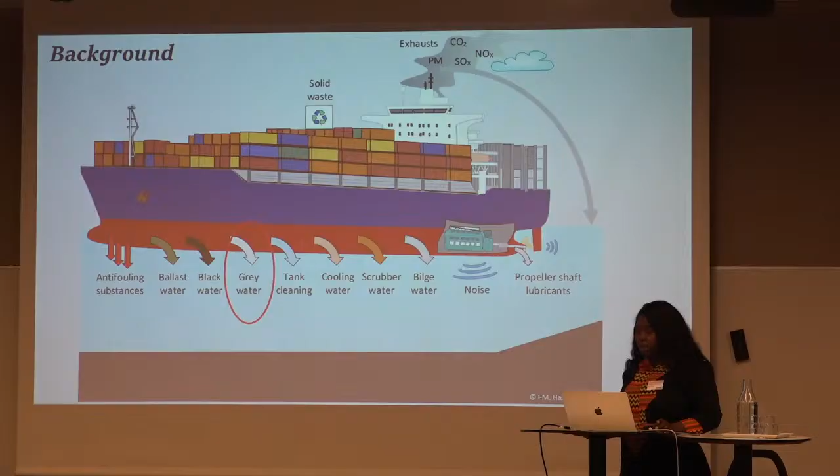So without repeating what my colleagues have already presented, we will be discussing greywater, the quantities and the quality. So greywater from ships is wastewater or sanitary wastewater from the accommodation, from the showers, from the kitchen, the laundry machines, and various things within the ship. And it contains chemicals, nutrients, metals, pharmaceuticals, as we are going to see.

And generation rates vary according to the size of the ship or the activities carried out within the ship. Greywater lacks international regulation right now, and that is the call for concern. Only recently has this raised an eyebrow, because of a lot of research that has been carried out recently on greywater. And management strategies are based on industry policies or initiatives and environmental stewardship.

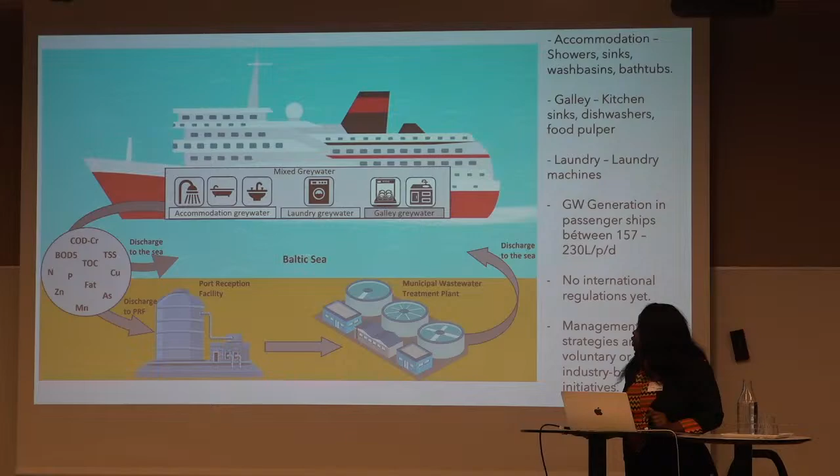So greywater could be discharged directly into the sea from the ship when generated, or it could be discharged to port reception facilities at the port, and then treated at the municipalities before discharging to the sea. Some other ships, like cruise ships, mix greywater and black water or sewage together and treat on board before discharge. And research has also shown that some ships mix greywater with food waste and discharge in accordance with the provisions of MARPOL Annex V.

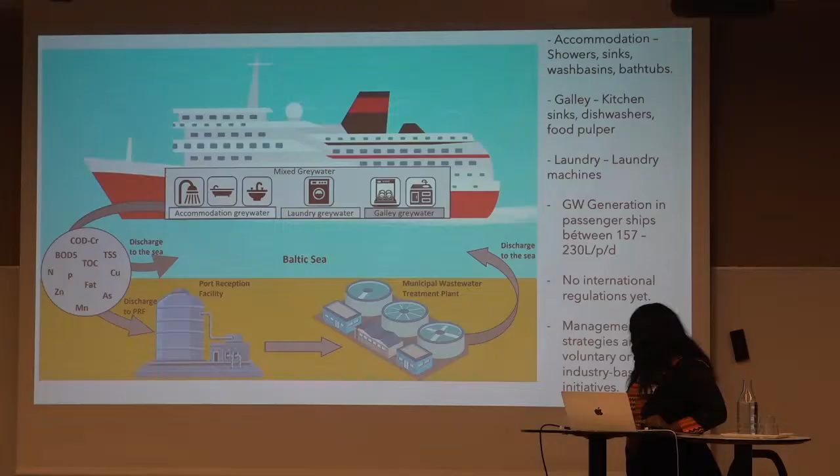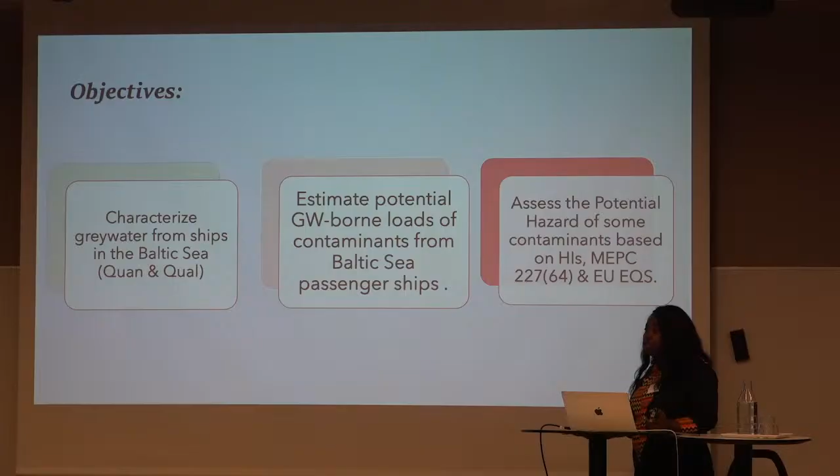So our objective within the framework of this presentation will be to characterize greywater, the quantity and the quality. We will also estimate the potential greywater-borne contaminants from Baltic Sea shipping as a whole. And we will look at the potential hazard of some targeted contaminants based on hazard indexes, MARPOL resolution, and as well the EU environmental quality standards.

So within our research, we worked with six ships. One is a special purpose ship, 5 are ro-pax ships. Ro-pax ships carry both passengers and cars. S2 and S3 are from the same company as sister ships, while S4 to S6 are also sister ships. The biggest ones are S4 to S6, then S2 comes after, and S3. Then the smallest ship is S1.

And the volume of greywater generated by these ships also varies, like I mentioned, based on the size of the ship. Sometimes there are discrepancies about that, but the number of persons on board determines the greywater generation volumes. The volumes are also seasonal and annual. We experience annual variations and then seasonal variations.

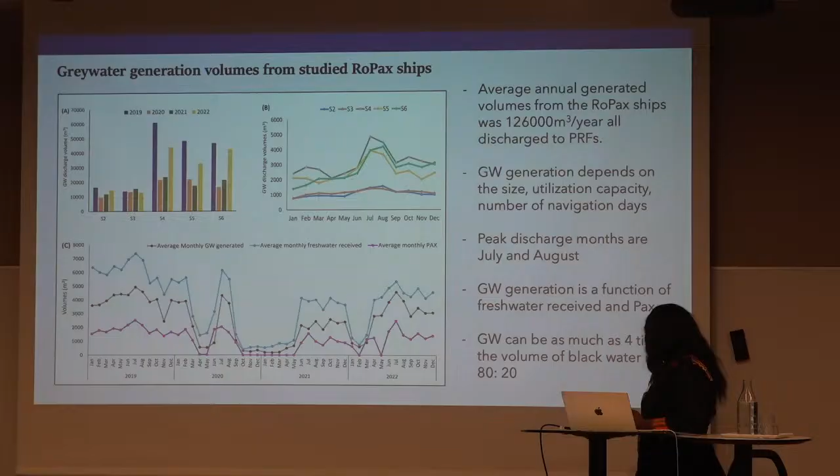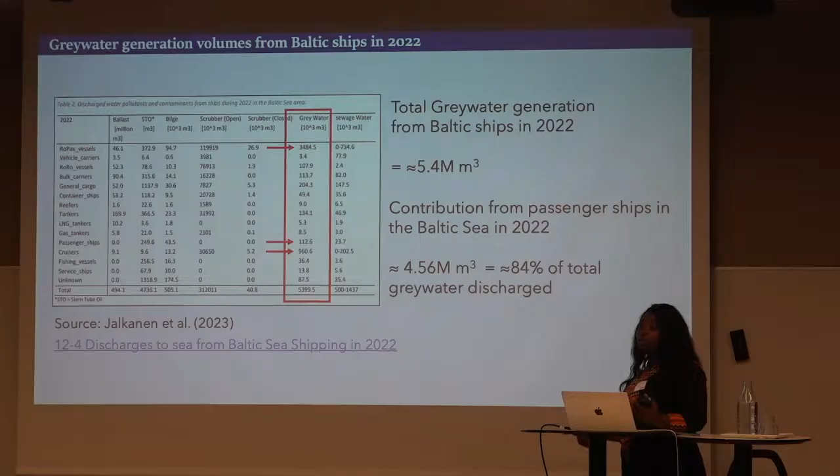So I borrowed this figure from Jalkanen and colleagues, to use these numbers to estimate the total load, I mean the potential load of contaminants from greywater within the Baltic shipping industry. And we see also passenger ships contributing the most. In 2022, 84% of the total volume generated was from passenger ships. And I want us to take note of this figure because we will use this subsequently to estimate the load of contaminants from the passenger ships within the Baltic Sea.

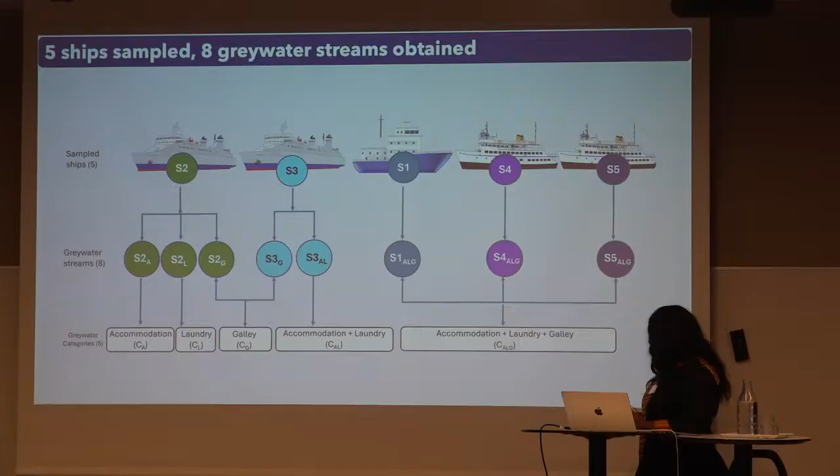So to achieve this, greywater was sampled from the ships. We actually sampled 5 ships and got 8 greywater samples. Our interest was more on individual flows because data for contaminants on individual greywater flows is very scarce within the Baltic region. But we succeeded. From one ship, we obtained accommodation, laundry, and galley greywater individually. From another ship, S3, we could get galley greywater, but accommodation and laundry was mixed. And for the other 3 ships, we got mixed greywater. Altogether, there were 8 samples.

So the results, we will begin with metals. I don't want to waste a lot of time, so I'll just mention that the most prominent metals we obtained in the greywater were zinc, copper, and manganese. These 3 metals contributed about 95% to the hazard index of the greywater. I'll mention what hazard index is.

My colleagues have already talked about risk assessment, and we use the same principle here. We calculated hazard quotients for each contaminant, which is the average measured concentration divided by the predicted no effect concentration. For each stream, we added the hazard quotients of the individual contaminants to get the hazard index of that stream. If the hazard index or the hazard quotient is greater than 1, then there is a potential hazard. We grade it as high hazard, medium hazard, and low hazard. So some have high hazard, some have medium hazard, and some low hazard.

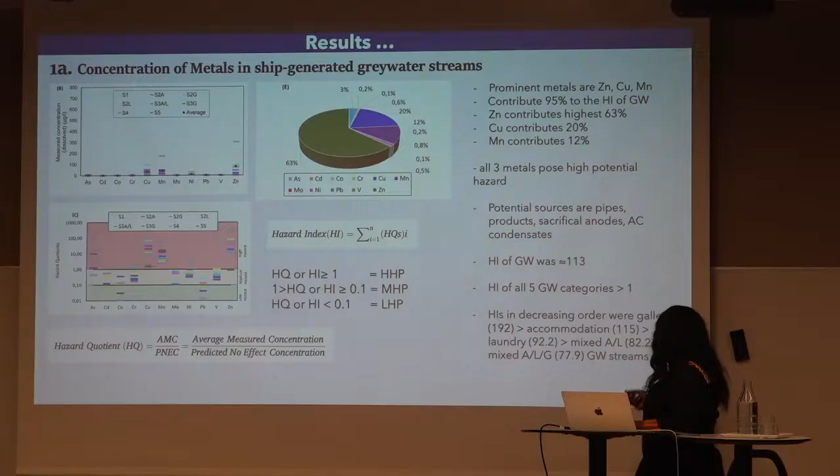But zinc, copper, manganese, and to an extent arsenic fell within the high hazard range. They had the highest contribution to the hazard index. Overall, the hazard index of greywater was approximately 113, which is far higher than 1, showing a very high hazard potential. In decreasing order, we also looked at the various types of streams, and the highest hazard potential was shown by galley greywater, and the lowest by the mixed greywater.

Then we have nutrients. Nutrient concentrations were compared with resolution MEPC 227(64), which is the standard for sewage from advanced wastewater treatment plants on passenger ships within the Baltic special area. Nitrogen was highest in galley greywater, and phosphorus was highest in laundry greywater. In comparison with MARPOL and the resolution MEPC 227(64) standard, nitrogen was within the standard. It was actually below 20 milligrams per liter for the geometric mean, and the phosphorus was above.

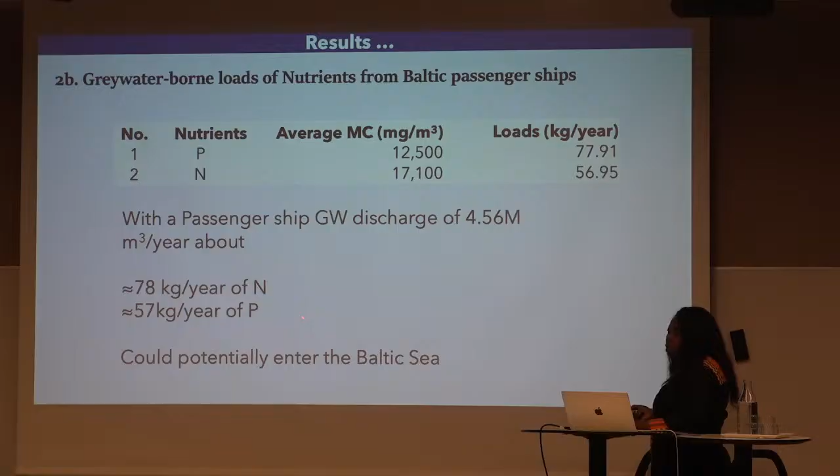So we could say that if phosphorus in greywater is compared with phosphorus in treated sewage that is expected to be discharged into the sea, then it could also pollute as much. And the average loads as well, considering this volume of greywater discharged from passenger ships, we could obtain this amount of kilograms of nitrogen and phosphorus potentially into the sea.

Then we have organic matter and oxygen consuming substances, notably COD, BOD, TOC, TIC, and fat. We see highest concentrations in galley greywater, which could probably be a result of food waste in galley greywater. We also compared it to the IMO resolution 227(64), and found that these concentrations are far higher than the requirement for sewage. The same with the loads. We could potentially have these tons of COD and BOD into the sea if all the greywater is discharged.

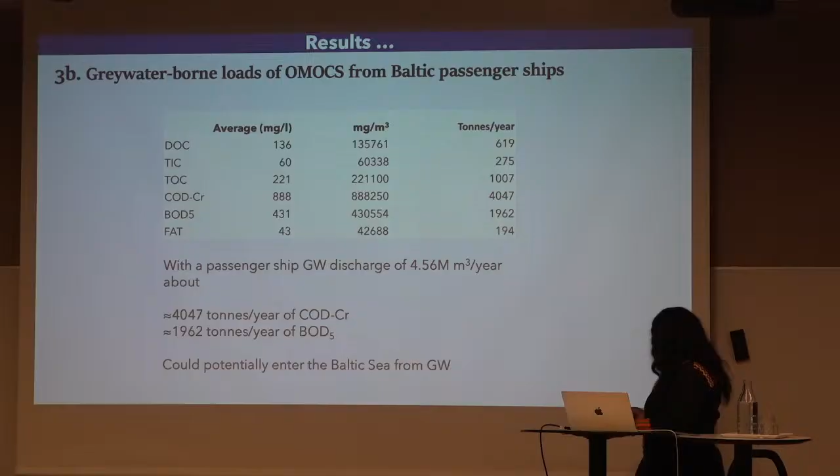Then we also have TSS, which we measured, and TSS was highest in galley greywater of ship 2, and secondly in mixed. Could you please say what is TSS? Sorry? What is TSS? Okay, total suspended solids, sorry.

The total suspended solids were highest in galley greywater, which would probably be a result of food waste. Then we have these loads as well. First of all, we compared the concentration with the IMO requirement for advanced wastewater treatment plants for sewage, which is also very high.

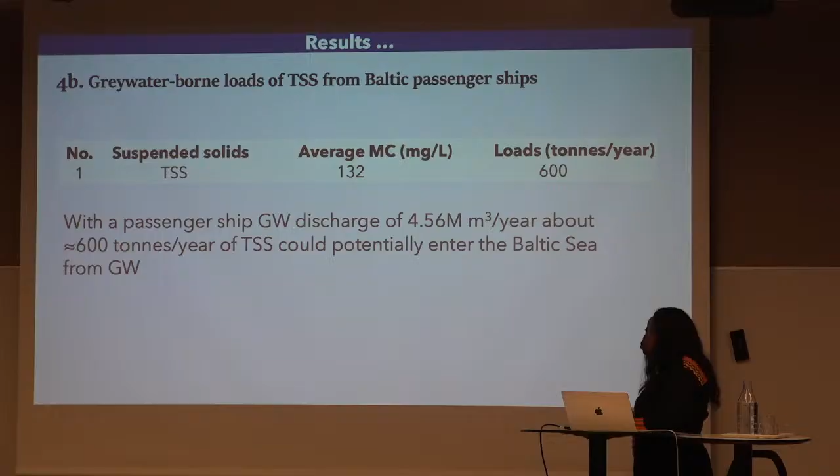Then we compared the loads, we calculated the loads and found that about 600 tons of total suspended solids could potentially be discharged into the sea from greywater.

And then we have microplastics. About 15 microplastic polymers were analyzed in greywater. And we see the highest concentration of microplastics in laundry greywater, followed by the mixed greywater. But our interest is in laundry greywater, as according to the literature, even land-based literature, laundry greywater is very high in microplastics concentration.

The particular polymers in laundry greywater were PET, polyethylene terephthalate, and polypropylene. And two of them contributed at least 74% of the total microplastic concentration in the greywater. The main source of PET is the washing of textiles, and the main source of PP is labeling and packaging. But PET also has packaging. We also have plastic packaging made up of PET.

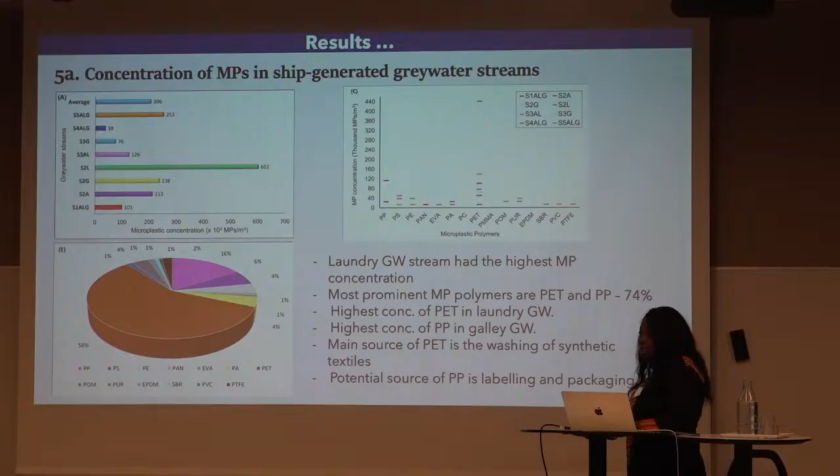Studies have also shown that even our chopping boards in the kitchen made of PET can also release microplastics into greywater and food waste. And we had special concern for the polymer polyoxymethylene, which is actually used in dishwashing machines for proper cleaning. It's used on board. So two of these ships use this, but strangely we couldn't measure this polymer in the galley greywater from the ships.

According to the literature, this polymer has higher strength and high resistance. Probably that is why it is commonly used on board for this purpose. And we could find only a minimal amount in a mixed greywater sample, which probably could come from other sources.

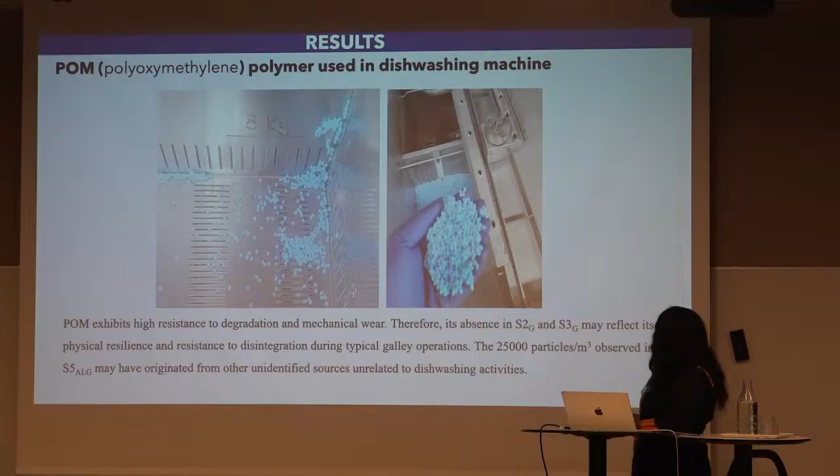Okay. And then we compared the microplastic concentration we obtained from this study with other studies to be able to know how big our own concentrations could be. And we actually found out that it is within the range of other studies, which shows that we should be concerned about microplastics from galley greywater in the same way as microplastics from other sources.

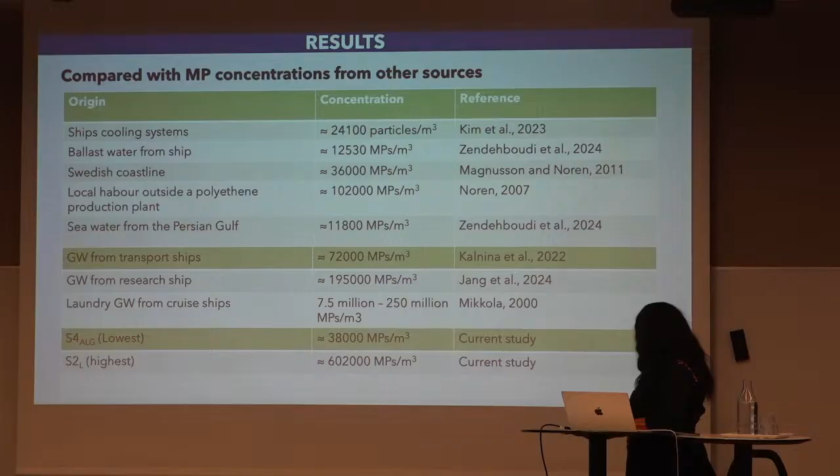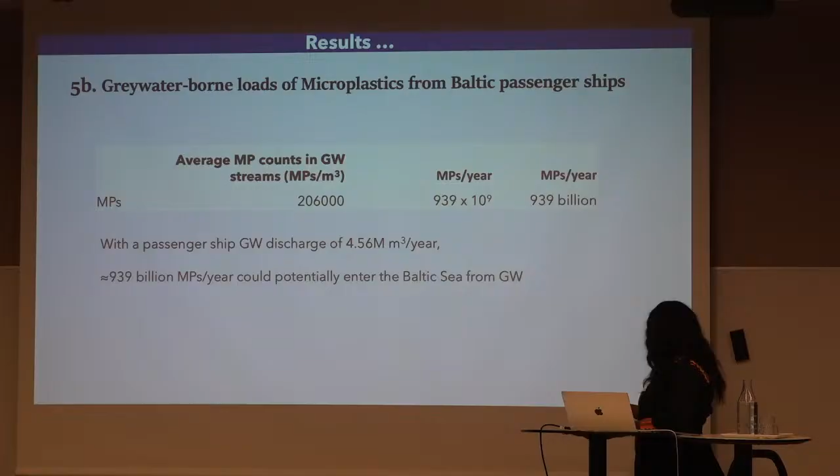Then we calculated the loads, which we obtained as close to 1,000 billion microplastics a year that could be discharged into the sea if all the greywater generated is discharged into the sea. And compared with sanitary sewer overflows, which are wastewater overflowing from a municipal wastewater treatment plant, our own greywater value was a bit lower.

Then, what should we do with greywater? What is the probable way that we could manage greywater to minimize the consequences of these contaminants on the marine environment? So we have this Lighthouse-funded project, which we are rounding up, in which we are carrying out a cost-benefit analysis of alternative greywater management strategies. We simulated 6 scenarios; some exist, some don't, but they are models. And we think analyzing these scenarios may give an overall idea of how greywater could be managed.

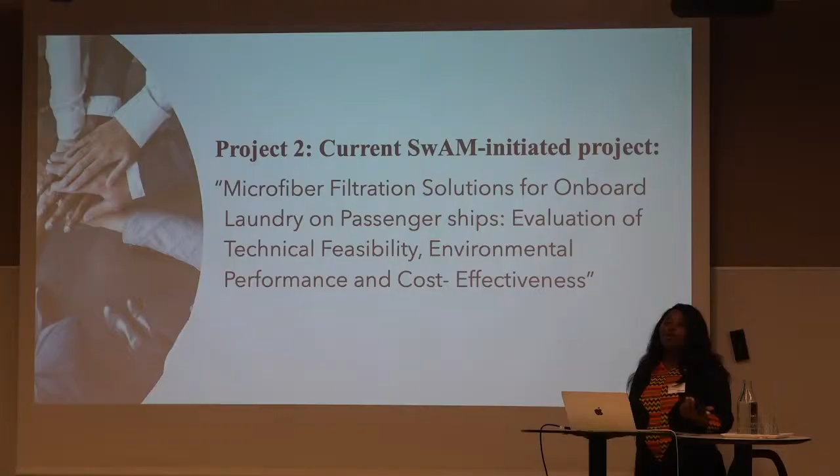We also have this SwAM-initiated and funded project, which we just began last month, on microfiber filtration solutions for onboard laundry on passenger ships. We are evaluating the technical feasibility, environmental performance, and cost effectiveness. We look forward to presenting our results in subsequent seminars like this.

So in conclusion, we would say that greywater contaminants are an issue if greywater is discharged completely into the sea. It is also important to note that all the RoPax ships we sampled discharge their greywater into port reception facilities. So further research on the actual number of ships that discharge greywater into the sea, and a proper environmental risk assessment, could determine the magnitude of the impact of greywater contaminants in the sea.

And we could also say that greywater could be included in MARPOL Annex 4. Yeah, MARPOL Annex 4, why not? Currently it is just sanitary wastewater, sewage, that is regulated by MARPOL Annex 4.

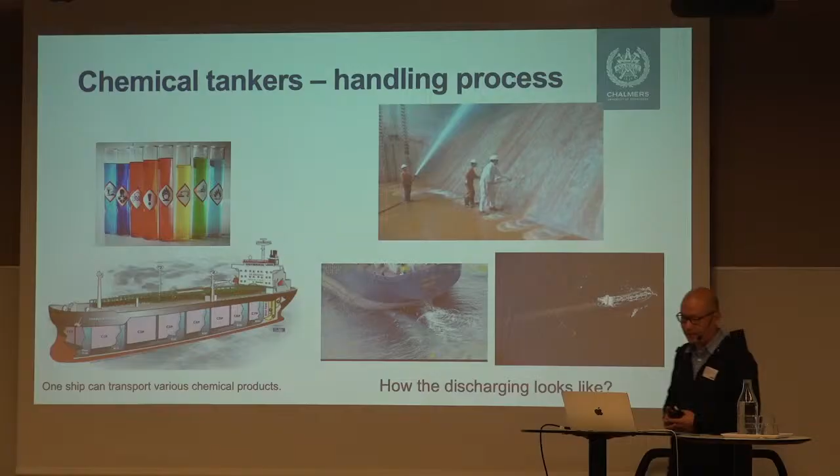If you imagine, we have something like 2,000 vessels in Swedish waters. Maybe one vessel operates 100 voyages. So how much chemical waste is just dumped into Swedish waters, and what kind of environmental impact can be produced by these tank cleaning events and waste discharges? In order to answer this, we also did an inventory study of countries in Europe and also in Asia, China, and the US. Different countries have different regulations on waste discharge into the sea.

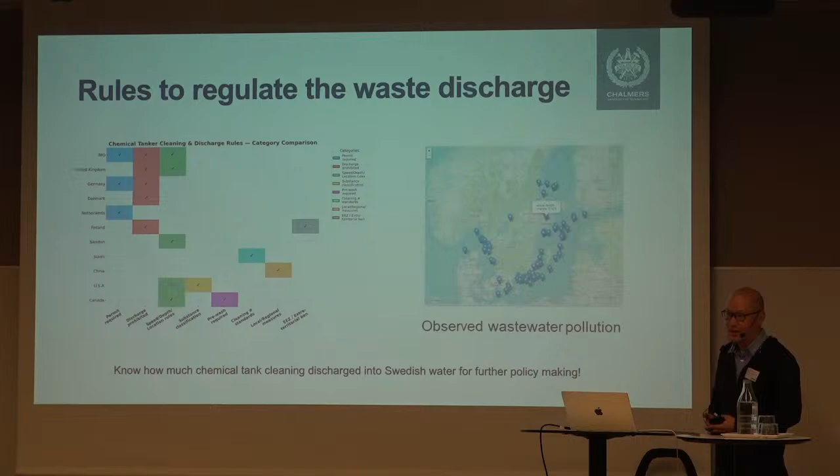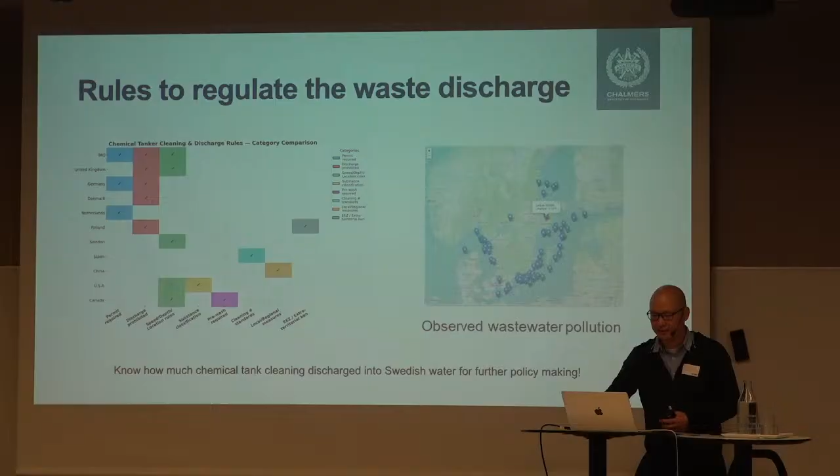Of course, we are more interested in Swedish waters. One question we may ask ourselves is whether the Swedish regulation is the most reasonable in comparison with all the others. In order to better understand which is the best strategy to regulate waste discharge from chemical tankers, we first need to understand how much waste has been dumped into Swedish waters. To answer these questions, we first want to investigate how to find when and where these discharges happened in Swedish waters.

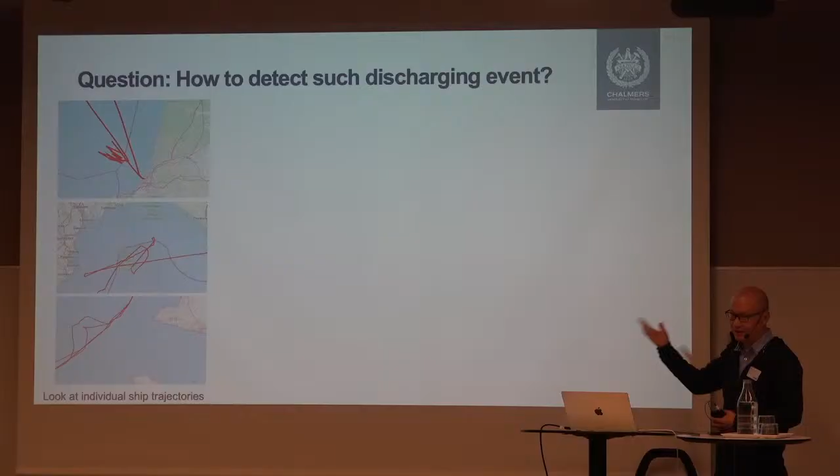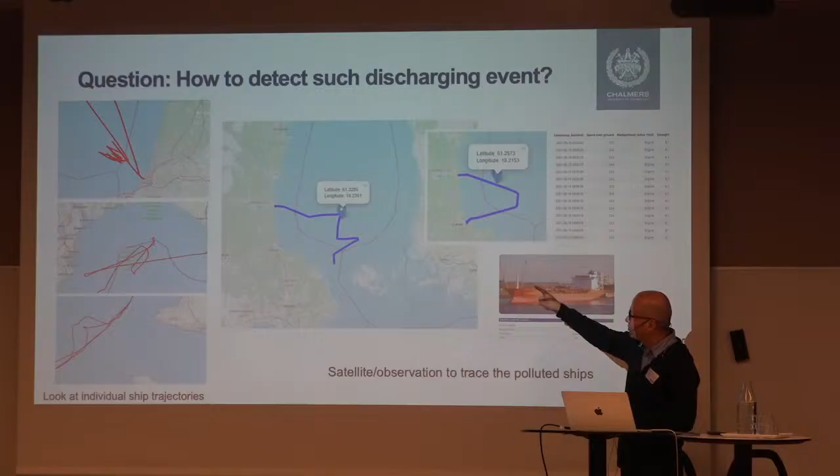One way to look at these discharge events is to look at each individual vessel's trajectories. As shown here, they are not doing transport work, just moving around, so we can easily see something happened there, tank cleaning. That is easy to see, but we need to plot them out. In some cases, they are not going back and forth, but go outside the economic zone and then come back. Compared with the shortest distance, the actual distance sailed, and of course the emissions, can be 2 or 3 times more.

And then that is one case: we can just plot the trajectories from the ships, and we can see that they are doing the tank discharging. By using these features, we can also see when and also how much of the water they have discharged, that they have put into the sea.

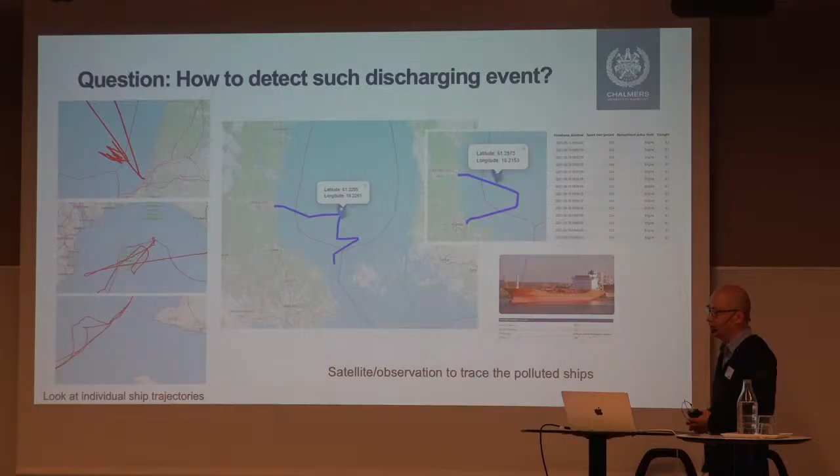But if we're just looking at the Swedish waters now, we have something like 2,000 vessels, and for each vessel we just count 50 voyages. So if we do this by manual plotting, I guess it will cost a lot, and no people are willing to do it in the daily work. And then the question for us is if we can use some AI together with some experience to automatically ask the computer to do this task for us.

So the method which we proposed, working together with the environment, is: first we have this AIS data, which we get from the Swedish Maritime Administration along the Swedish coast. And then we are using our experience. The experience can be, for example, the Coast Guard. They do find some kind of discharge, and then we can see this discharge and find some patterns from the navigation perspective.

And we also have some experience about how the chemical tankers navigate when they are discharging the waste into the water. And then with this experience, we can see if we can create some AI agent to look at AIS data by themselves. And then they can give you the information needed about how much and when they have done this waste discharge.

Yeah, so maybe it's not wise for me to talk about the details of the AI and also the domain knowledge. So I just want to show you some results. The first result, we're only using the AIS plus the domain knowledge in terms of the AIS. I guess all the people here must be familiar with the AIS data. If we're looking at AIS data, the rule is that vessels which are sailing, like cruising, need to send the AIS signal maybe every 10 seconds, maximum 10 seconds,

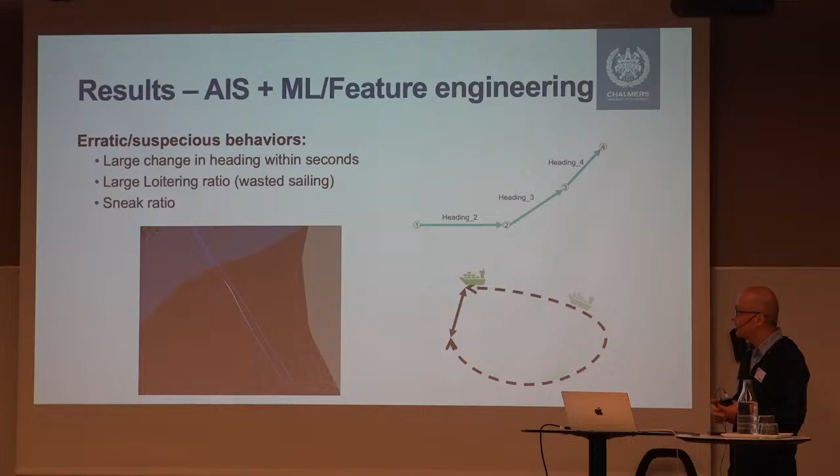So this way, we can define some suspicious behavior, and we can give it to this AI agent. By doing it this way, the AI can also help us to, let's say, find all these suspicious trajectories.

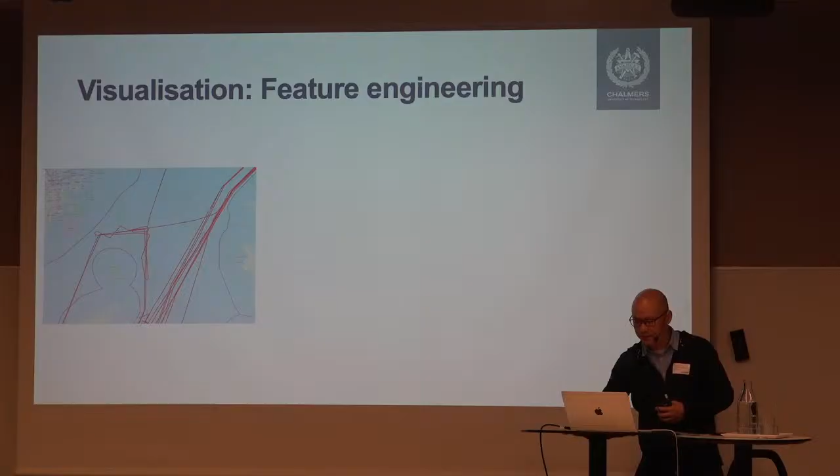So after we have found all these suspicious trajectories, that is another product which we produced in this project: we put all the trajectories in the visualization platform. Within this visualization platform, if you click any of the routes, it will pop out the voyage ID and the IMO number of this vessel. So you can see which vessel is doing this kind of event. You can also see how long they have been doing this discharge.

By this way, we can also have a very nice way to communicate with the expert, to determine if this ship is doing illegal or legal discharge, in terms of whether they are outside of the economic zone or inside it. So that is now some result.

The only information we are using here is the AIS data. But if we look at how captains navigate these ships, in addition to the AIS data, we also have other information like the bathymetry of the navigation and also the coastline, and sometimes the weather conditions will also be different.

So can we also take into account this kind of parameter in the anomaly detection of tank cleaning? Doing this won't be as simple as the feature engineering we've done so far, so we need a little bit more advanced AI agent.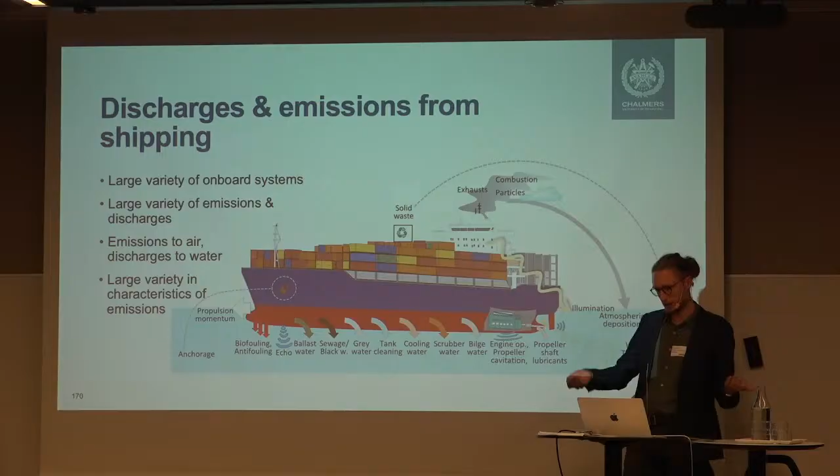Within our project we focus on six waste streams: antifouling, ballast water, sewage, greywater, scrubber water, and bilge water—more or less all of which you've already heard about, so I won't spend too much time on those.

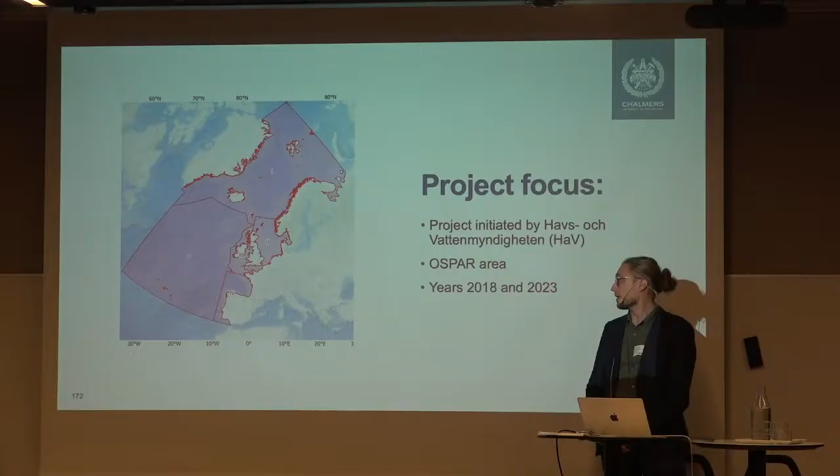The project itself was initiated by Havs- och vattenmyndigheten, and we focus on the OSPAR area, which you see there in red—basically the Northeast Atlantic. It falls under the OSPAR Convention, an agreement by, I think, 15 contracting parties to try to avoid marine pollution and negative effects on the marine environment.

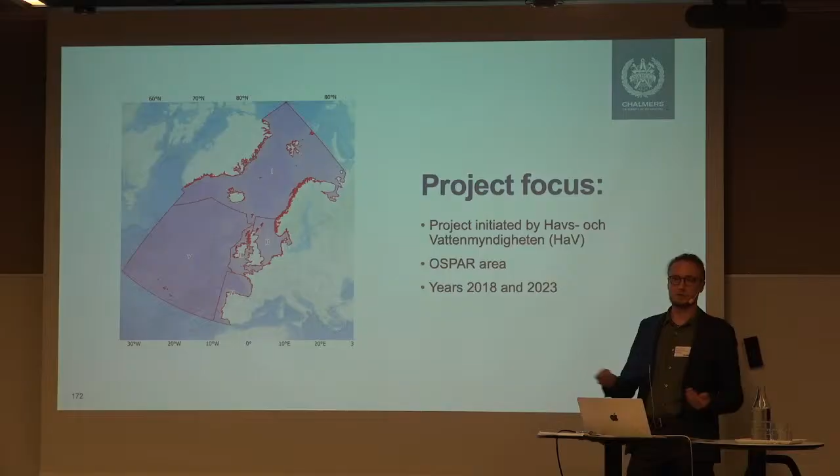We focus on the years 2018 and 2023. 2018, because after that we saw a big increase in scrubber installations, so we wanted a reference point before that. And 2023 because it was the last year with a full dataset, and also to avoid introducing bias due to COVID-19, so we didn't choose a year before that.

As you've also already heard, regulation of discharges from shipping is usually based either on substances or on waste streams, so it's not a very comprehensive approach—usually you regulate one waste stream at a time. For example, releases from antifouling paint are covered by the AFS Convention that Erik already talked about, and also the Biocidal Products Regulation within the EU.

Ballast water is covered by the Ballast Water Management Convention. Sewage is covered by MARPOL Annex 4. Greywater, if mixed with sewage for example, is also covered by that. Scrubber water is covered by MARPOL Annex 6, but there are also local regulations, such as bans on open-loop scrubber discharges in territorial waters. And bilge water is covered by MARPOL Annex 1 on oily discharges, but again there are local regulations—for example, you're not allowed to discharge oily water in Finnish territorial waters.

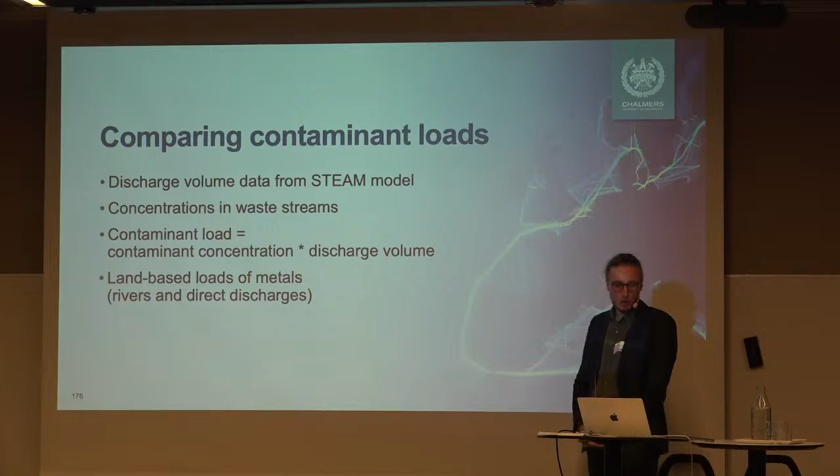Then we also have information about the concentrations of different substances in those waste streams. And as Jane already said, you calculate the load by multiplying the volume—for example, 500 liters of a specific waste stream—with the concentration of the substances in that waste stream, and then you end up with the load. In addition, from OSPAR we also have loads of metal inputs from riverine inputs and direct discharges, which is, for example, industries on the coast that release as a point source.

Now, the results from that look like this. On top you see the direct discharges from coastal industries, in the middle you have the riverine inputs, and at the bottom you see the inputs from shipping. The light blue boxes are year 2018, and the dark green boxes are 2023. You see copper and zinc are basically dominating in all three categories.

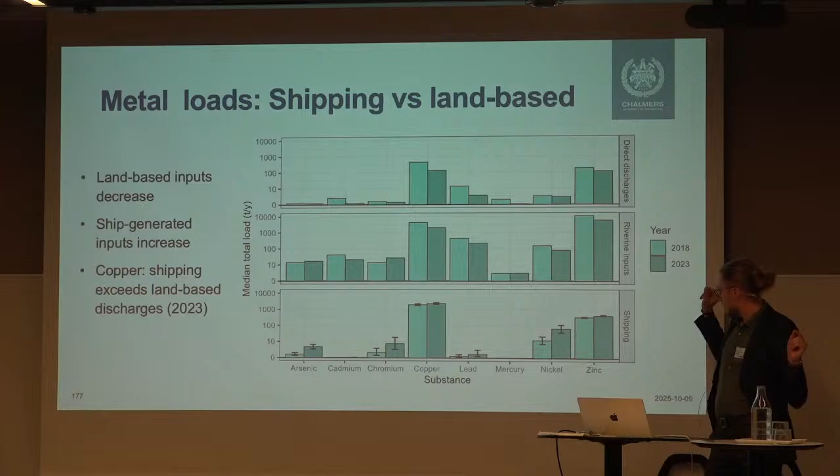You also see that direct discharges and riverine inputs overall, in terms of metal, have a larger load. But you also see that copper, for example from shipping, actually overtakes the inputs from riverine input and direct discharges combined between those two points. So at some point between 2018 and 2023, copper loads from shipping overtook those from land-based sources.

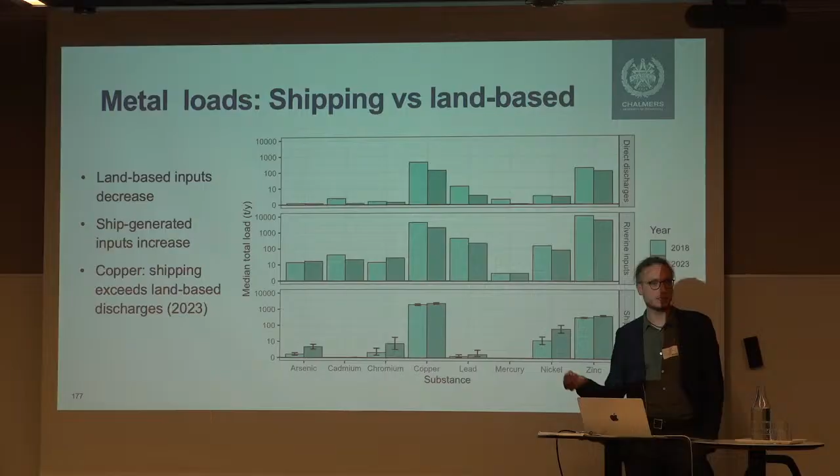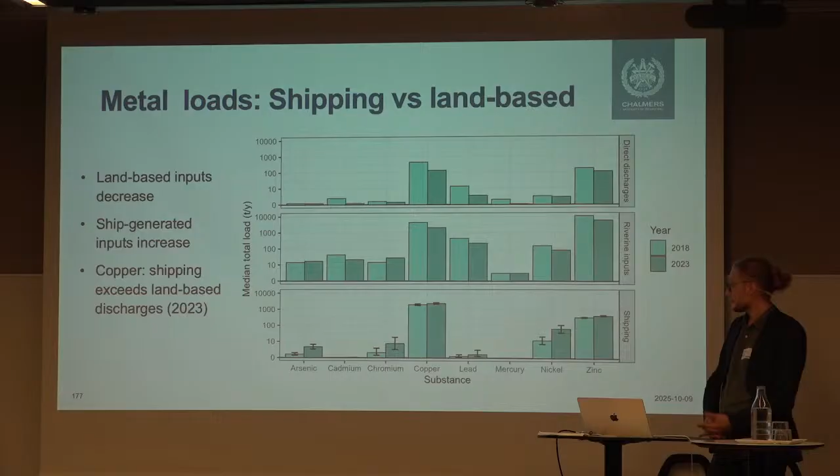What you also see is that the inputs from shipping generally increase—at the bottom, the dark bars are always higher than the light bars. For the riverine and direct discharges, for almost all substances, they decrease. So you have opposing trends there, so to speak.

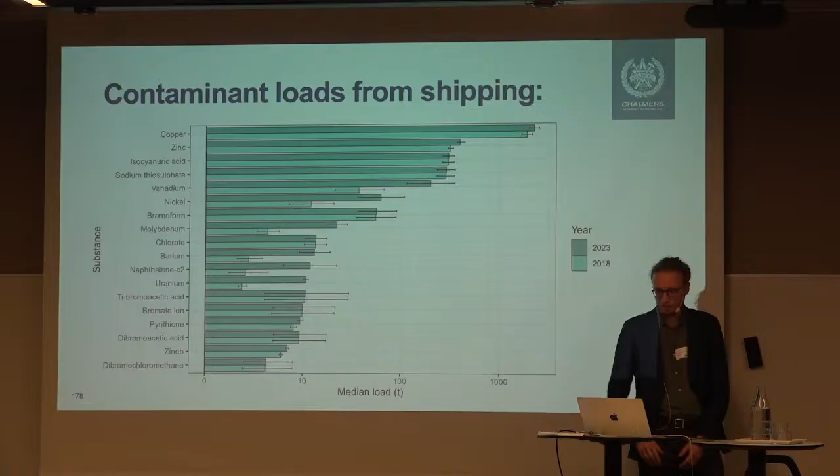Now, if we focus or zoom in on shipping itself, we see again an increase everywhere. The dark green bars are the 2023 values, the light green bars are 2018. The largest loads, again, are copper and zinc, and then you have isocyanuric acid, sodium thiosulfate, vanadium, nickel, and some more metals. So those are the 15 largest loads that we see in shipping.

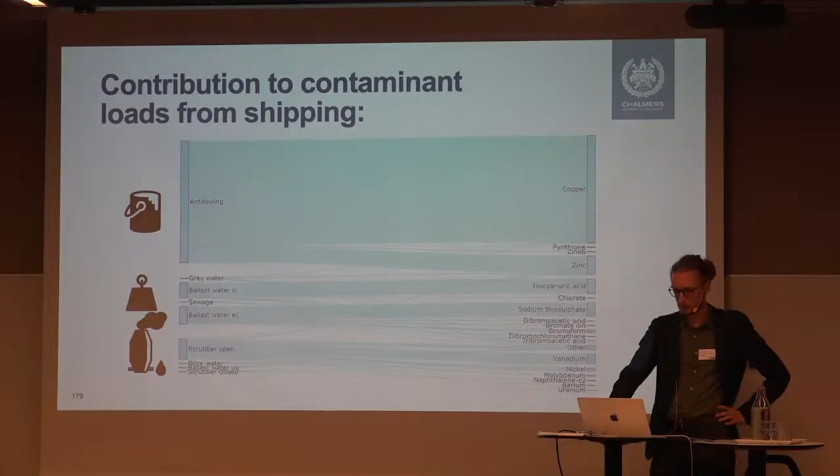As you also heard, we are not only interested in the amounts, we're interested in how toxic it is, how to assess the toxicity or the potential toxicity. And one essential thing that also was introduced by Anna and Eric is the risk quotient, or it was introduced as risk characterization ratio by Anna, for example.

So you have the measured concentrations and you have a specific threshold concentration that you consider as safe. And if you put those two into reference and the resulting number is higher than 1, so if the concentration exceeds the threshold, from a risk assessment perspective it's an unacceptable risk, so you don't want that.

But, as Jane also mentioned, we have to multiply this by the volume in order to take into account how much of those waste streams are actually exiting the ships or being introduced from ships. So we multiply the risk quotient of each substance by the volume of the corresponding waste stream that it comes or that it occurs in.

And then what we can do, we aggregate this across substances on different levels. So for example, we can aggregate this all together and then get what we call a hazard index, for example, for different OSPAR regions, or we can sum it across different waste streams. So we can compare the contributions to overall toxicity between waste streams, for example, or between regions.

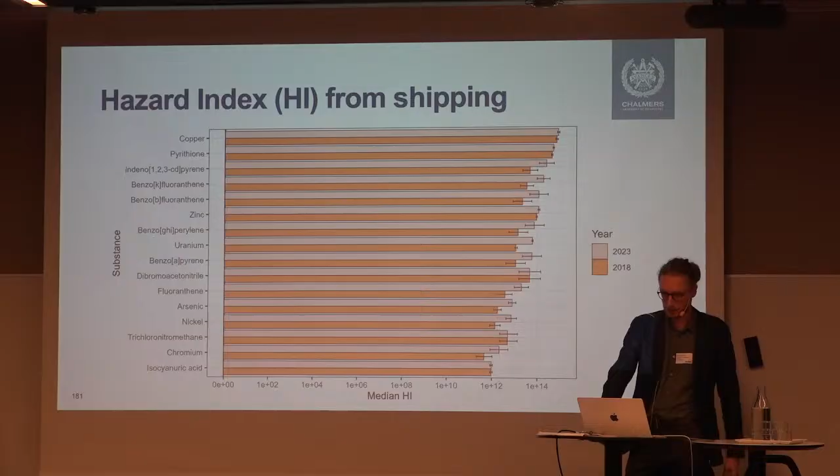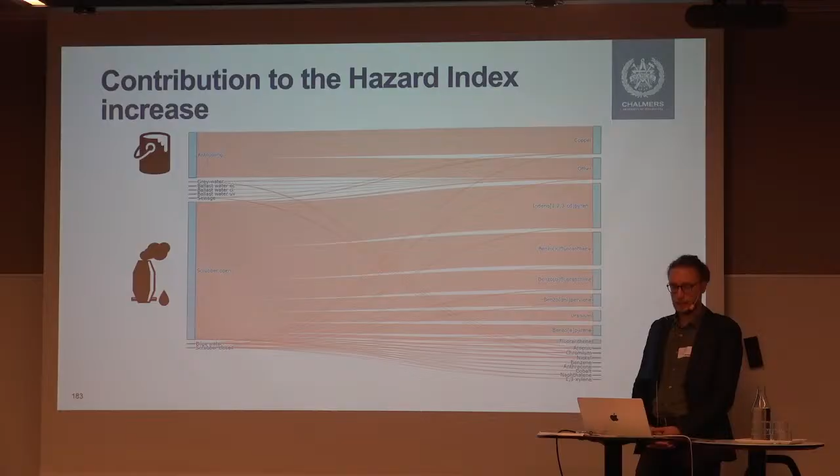Now, if we only look at the increase, we see what drove the increase in toxicity, then it looks like this. So the increase in toxicity or in hazard index mainly comes from scrubber, and then antifouling suddenly becomes the second. And this is due to two factors. You have an increase in shipping activity overall, which is why we see an increase in every single waste stream in the loads, in the hazard index everywhere. But between 2018 and 2023, as I said, we also saw an increase in scrubber installations. So this is a combined effect of both.

So, what do you take away from this? Basically, the land-based metal contributions were large, but they are decreasing, while for shipping, we see the opposite trend. So shipping emissions are going up, or discharges are going up. And the largest footprint are from antifouling and scrubbers. And scrubbers, as I said, contribute a lot to this increase, so they are actually catching up fast.

And potential solutions to this would be cleaner fuels or alternative fuels, entirely different types of propulsion, and also the biocide-free antifoul or the biocide-free foul release coatings that Eric already mentioned. And again, because the mixture toxicity of these cocktails can be so much higher, it is important that the legislation also takes into account the overall inputs and not just looks at single waste streams or single substances, because then you might very well be under specific thresholds, but if you look at it overall, you might still observe an effect that you don't want to see. Yeah, thank you. And thank you also to...

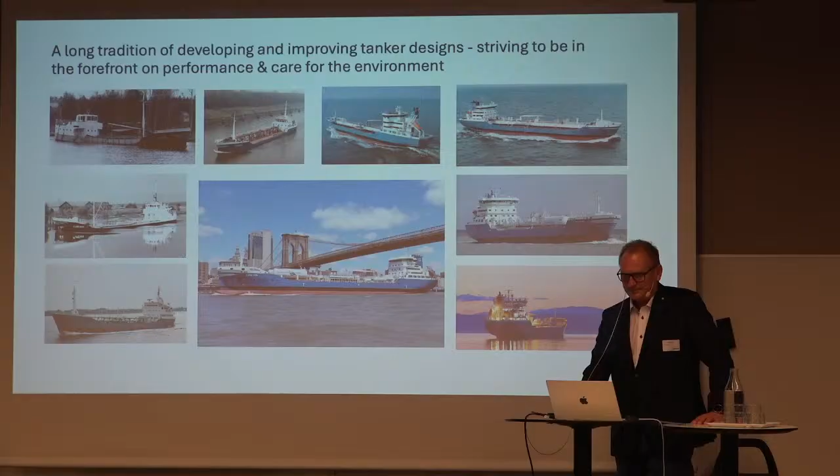And at the moment our main business is that we operate a tanker pool. So we operate in-house 27 vessels from these different ship owners, where we have a majority of the vessels. And we have 5 vessels currently on order in China that will be delivered from next year until April 2027. And the purpose of pooling vessels is that we are operating in the spot market. That is our main business. Then we have some vessels on time charter.

When you have a vessel on time charter, you rent out the vessel to a customer that uses it how they like. But if you run vessels in a pool, then you try to minimize the ballast legs, to find as much as possible triangle shipping, so that maybe you have only one leg that is ballast, and in that way making more money for everybody.

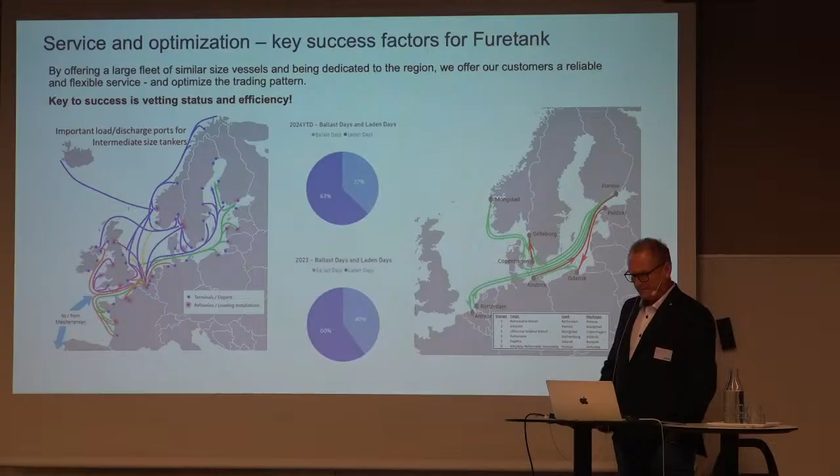And we are the biggest operator in our segment in Europe. The segment we are calculating is 15,000 to 20,000 ton deadweight. That is a normal size for depot distribution and also trading business in Europe. And the vessels are about 150 meters long, and they carry about 20,000 cubic meters of cargo.

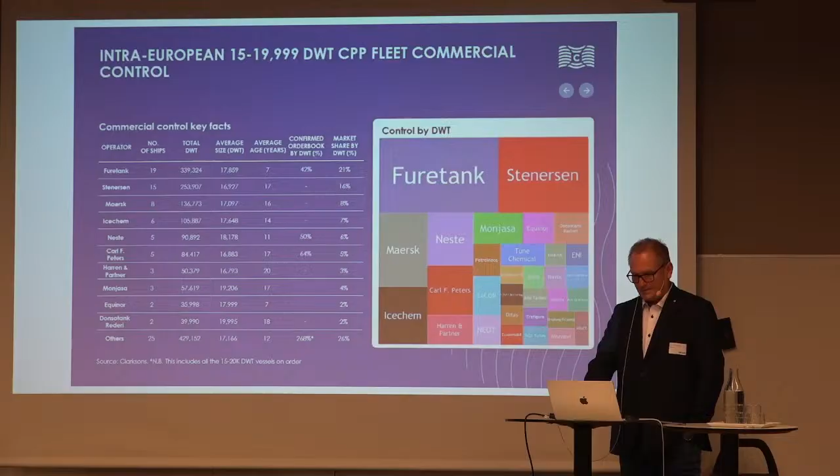And all this we have talked about today, so I don't need to show it. But if we talk about environment, this is what we should comply to. And as we saw here today, zinc is one big polluter in European waters. Why do we not have the same as the US with the Vessel General Permit, where it's not allowed to have sacrificial anodes of zinc, for example, that would have been easy to adopt in Europe? Also, in the US it is not allowed to have mineral oil in any oil-to-water interface.

And most of these things are quite easy to adapt to. The one that is more complicated is national regulations in different places in the world, and also customer requirements, because that can be whatever. All other things are quite easy to forecast and develop to. And how do we do this? We build new ships. That is a quite good way to adapt and future-proof the business. And the hard thing is that you should also future-proof for 20 years forward when you build a tanker.

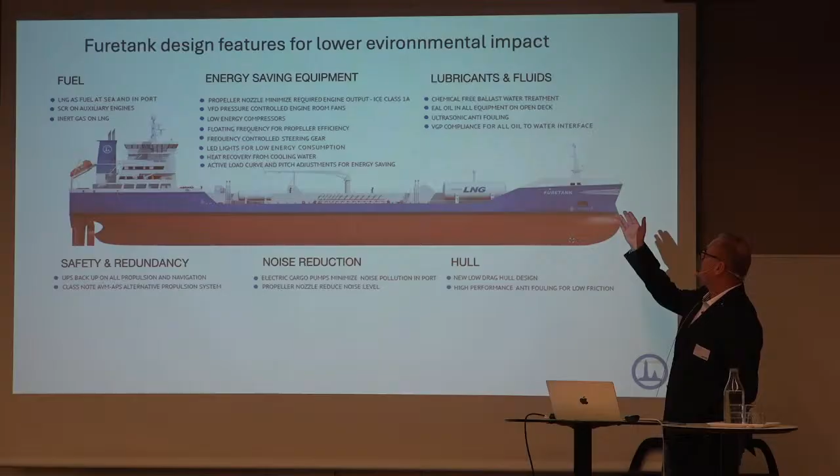And we added that to the specification, which means that we needed to apply for VGP for the US and some other features for the canal, which afterwards built up a totally new business for us. So now we employ at least 2 vessels every summer in Canada. And we started a cooperation with a Canadian company that is part owner in 10 of the vessels we have ordered. So small things can have a big impact in the development.

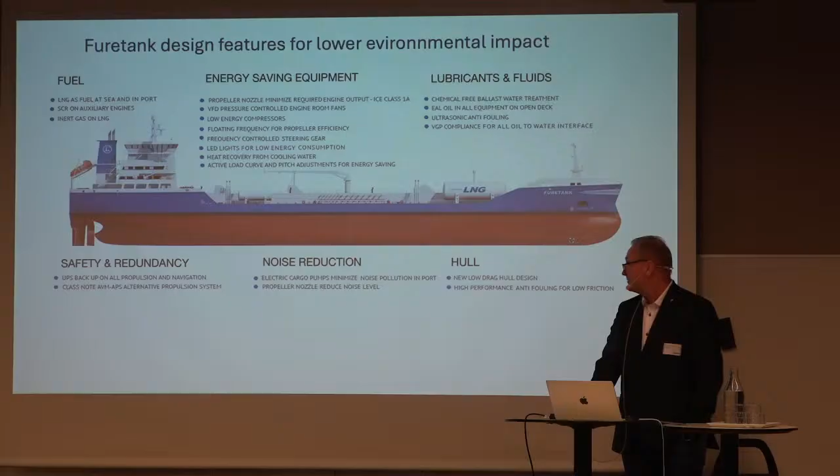But of course, one of the biggest things is CO2 for us today. It started with NOx many years ago and went over to SOx, and now everybody is only talking about CO2. And one thing that we did also with these vessels when we built them was with the noise.

That is not a requirement yet, but it is a requirement in many ports, especially on the continent, but also Preem Brofjorden. They continuously measure noise from the vessels from fixed measuring points. And if you make too much noise in the port, you get a protest. And if you don't do anything about it, then you're banned from the port for 6 months or something. And that is due to their environmental permit for the refinery.

But doing this involved that we should have big silencers on the fans that are 3.5 meters high. And we should install this somewhere in the ship, and the shipyard was very confused about this. They said there are no other ships that have this. Why should you install this one? Very big. And we said that it's needed because there are people living close to the ports and they're complaining, so we should have this.

And then the Chinese guy looked at me and said, so you mean it's impossible to move the people? Yeah.

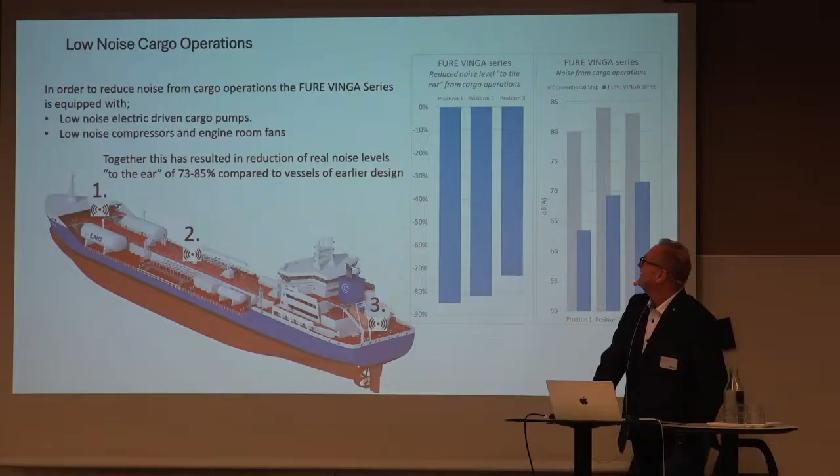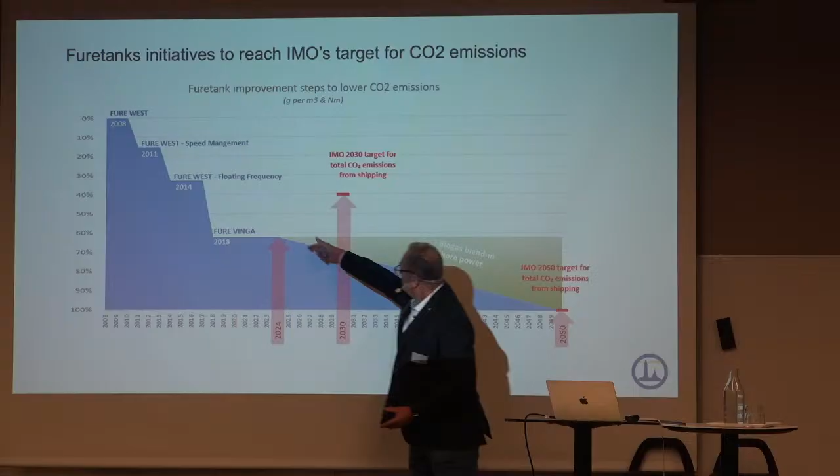But this graph here is a little bit old. Actually, today it looks maybe like this. It goes straight down here because we have changed over to biogas on all vessels that are gas fueled. And this is due to FuelEU and trade of ETS. So we can sell our CO2 surplus that we get from the biogas.

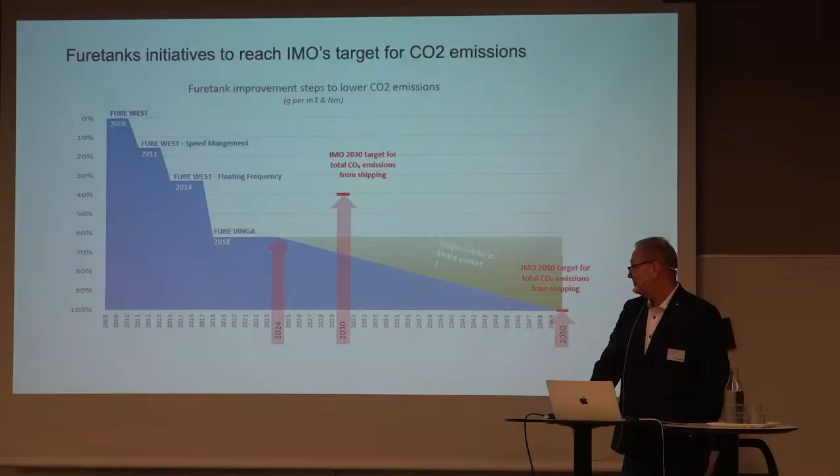Then there is shore power. I think there are 3 ports in the world today for tankers, Gothenburg, Gävle, Long Beach, that have shore power. But we took the decision to install this in the vessels that were delivered in 2024. And that was also this that we talk about, future-proofing a vessel.

When you come to many ports, they talk about how your business case looks for this. There is no business case in this, as in many other things we do, because you choose if you should do it or not, and then you hope that it will be good. Many times it's not so much science. You have many things. You have one chance to do it in a vessel.

It's the same as all these ships they build that are ready for all kinds of things. There will never be anything of that. It's just on paper, because it's not so easy when a vessel is delivered to do big changes. It's very, very expensive and takes very much time. And to do this when you build a new vessel, the cost is not so much if you look over a 20-year period.

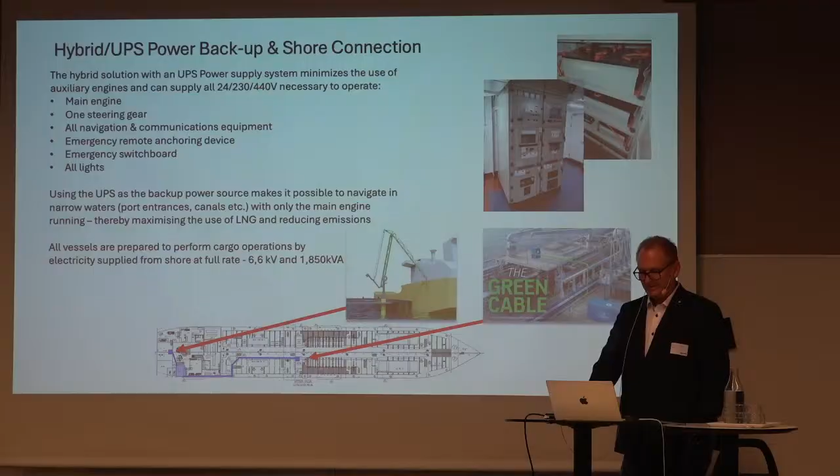So our fleet of vessels equipped with shore power looks like this. I think we have the most tankers in the world with shore power. I don't think anyone has more vessels. So we have in total 16 vessels in 2027 with high voltage shore power connection.

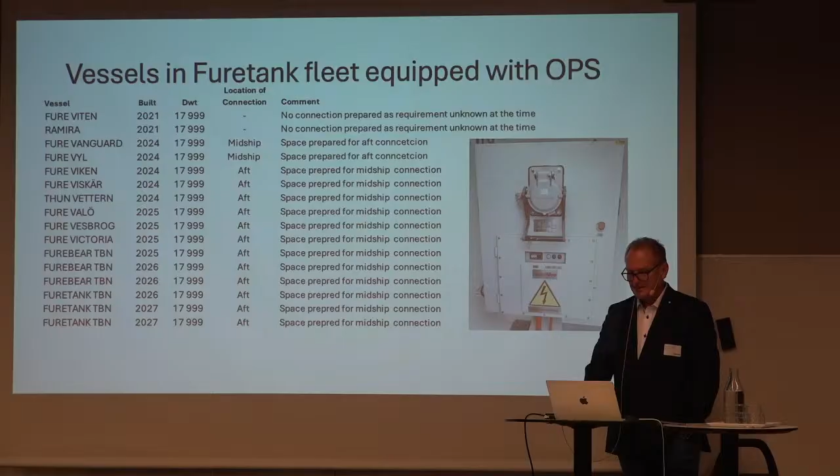Then we have a little bit about this with responsibility for the different reporting and cost for the CO2 trade, where the goal all the time is that you should get the cargo owner to pay for the cost. That is not always so easy. For us it's quite easy, because we are often both DOC holder and owner, but for most of the vessels in the world it's different. The vessel owner is one, the DOC holder is somebody else, and the commercial operator is maybe a third one.

And then we have started a separate company today for pooling CO2. The benefit with this is that if we have a vessel that has a lot of surplus of CO2 rights, then you can sell that to the others that have a minus on the CO2. Then they can sail for some time more without doing maybe expensive technical changes on the vessels. Then they become like this.

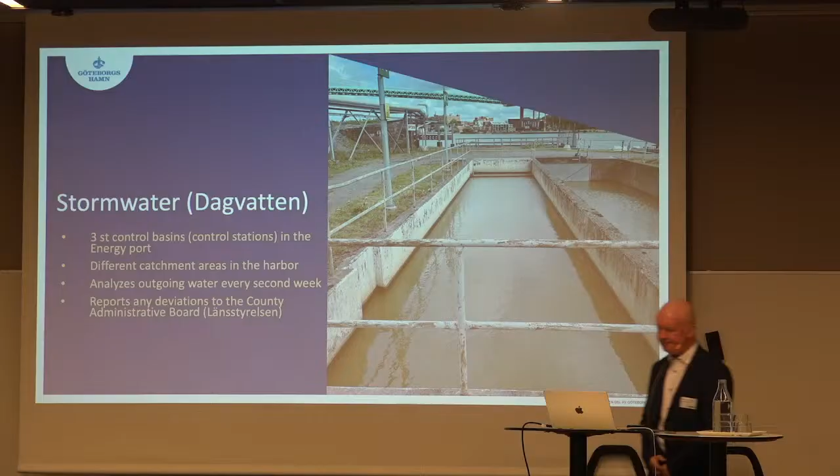Just a small thing about PFAS, because we've put a lot of hours in the last month into this area. I think our port is like many other ports, old areas that have been a port for a long time. There have been a lot of different businesses, and sometimes fire drills with foams put out to see how they act, so a lot of things have happened in the port area over the years. We are now mapping PFAS 11 in the energy port area, and it's important for us to see where we have places polluted with PFAS.

We also look upstream, to see if it's possible to locate locations where we can take the ground or soil, put it away and clean it, or deal with it some other way. We now have an ongoing project to build a treatment system in the control basins to take care of this PFAS, so water coming from different areas in the port goes to these control basins, then into some kind of filter arrangement, and then out to the sea, cleaned. That's a project we've started.

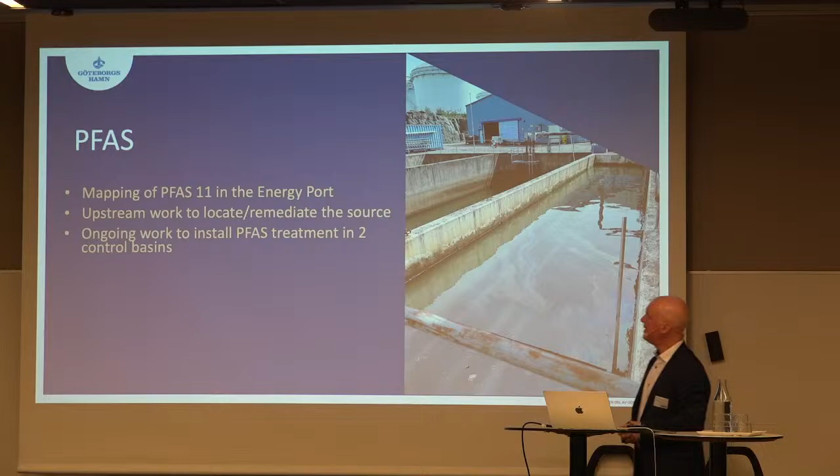Then there's wastewater and slop from the shipping. It's important for a port to be able to take care of this, and it's necessary for us to accept almost all kinds of waste that the vessels need to dispose of. There's a lot to deal with, because like Claes said, the ships want everything as cheap as possible, and it's very important for us to be efficient. If we want the shipping, we need to be efficient and not take too much in fees for vessels coming to our port.

We also try to use the EU waste hierarchy, working to move waste as far up the hierarchy as possible, which is good thinking. It's possible, and we try to do our best to make it as good as possible in that way too.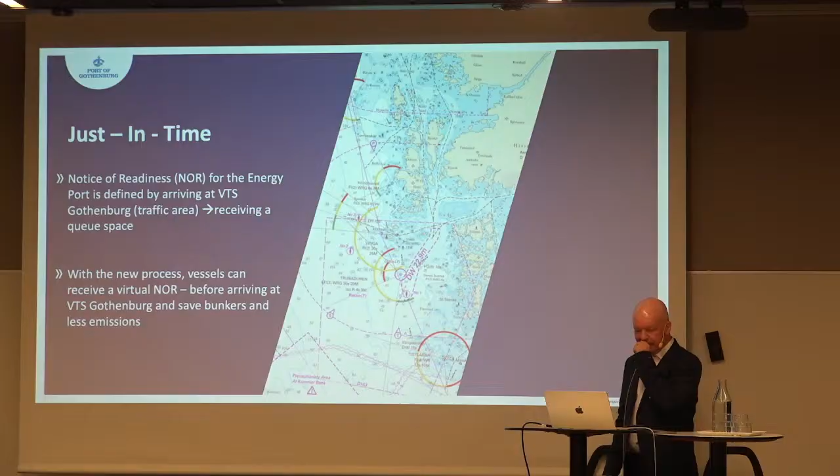Just in time, I think that's been a word in the industry for many years, but now we also try to use it more and more in shipping. And the main thing with this is that, like it is today, because the agreements and so on, it's pretty old in our business.

So today, an oil tanker maybe that will come to Gothenburg to do the loading, they come with full speed and put the brakes down and drop the anchor, and then you need maybe to wait 2 or 3 days. So there we see that if you can make that process a little bit more efficient and use this virtual notice of readiness, you can adjust your speed so you are saving bunker and saving the environment.

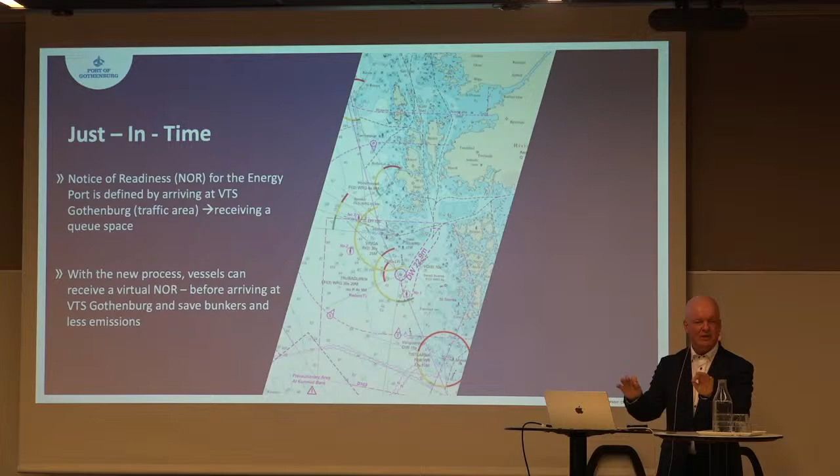So everyone is happy. But it's a little bit of a struggle to make this new agreement, and what's necessary in this part is that you in some way trust each other. If you give a time, you put a time into the sheet, and everyone is trusting that. That's not so easy as maybe it should be.

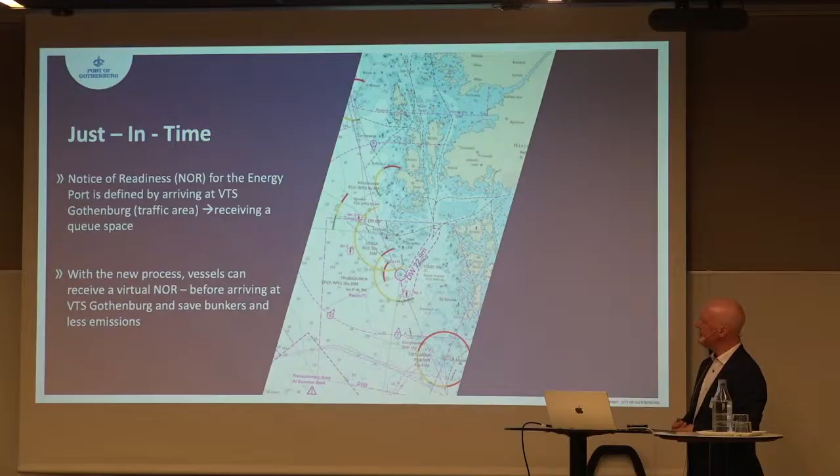But we have been working with this for a long time, and also finding systems to deal with it, and also be able to see when the shipping is coming and so on.

It's a very good outcome of this installation. But like Claes said, we maybe don't get the money for it, but we think it's a good thing for the environment to do this.

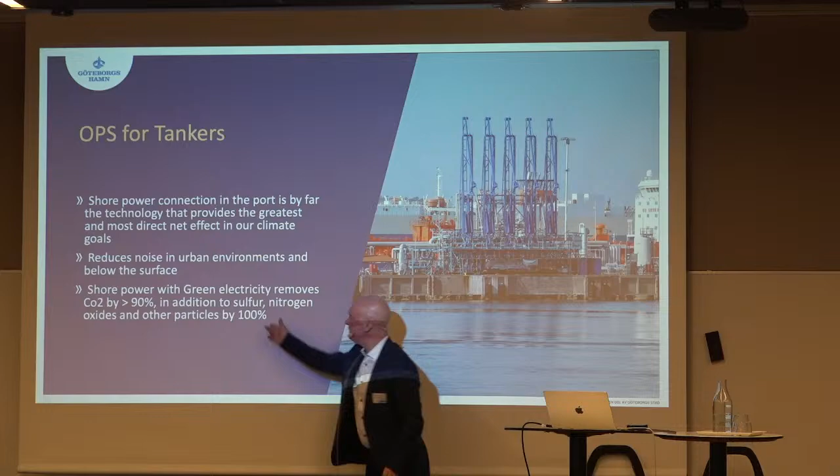The tankers, when they are connecting, they can stop the auxiliary engines, and it's very silent on board. And also in the area around and into the sea, it's very silent. So we think that is a good thing for the future. And also, as you see here, it removes a lot of these particles and so on from the area.

More actions from our side, just a few things. We have something we call the green bunkering concept that we have had for a few years, many years, so to say. And it's also a concept and some kind of regulation that we have for the bunkering industry, bunkering operations.

So if they will come to Port of Gothenburg to do bunkering operations, they need to apply to this, and we do a certificate for the bunker barge. And there is education for the crew, and equipment that's needed on board to deal with it if there's a spill. And also third-party inspection of the vessel to see that it's okay with the important things on board.

We have port staff on duty all the time, doing rechecks and going around the area. They are checking the seaside and checking the shore side to be able to see if there are any leakages, some damages, or whatever. It's very important for us.

And also, we have been talking about scrubber waste. It's possible to put that into shore, into Gothenburg, but maybe not for so long. We will see how the future will look like.